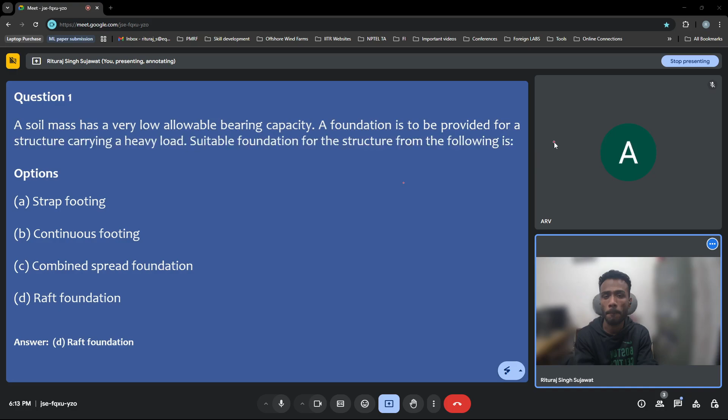So instead of distributing the load among the discrete foundations, you are basically transferring the whole load coming from the superstructure to a raft, and then that raft will basically transfer your load to the soil beneath. So yeah, the answer D, the raft foundation, for question number 1.

Moving to question number 2. So the bearing capacity of soil strata which is supporting a footing of size 3 meter by 3 meter will not be affected by the presence of the groundwater table if it is located at a depth of, so you need to determine that depth of water table such that below that it won't affect the bearing capacity of your soil strata.

Okay, question number 2D. So yeah, let's wait for 1-2 minutes. In that case, let's say when we'll upload the video, this will give time to our learners who will watch the video at a later stage.

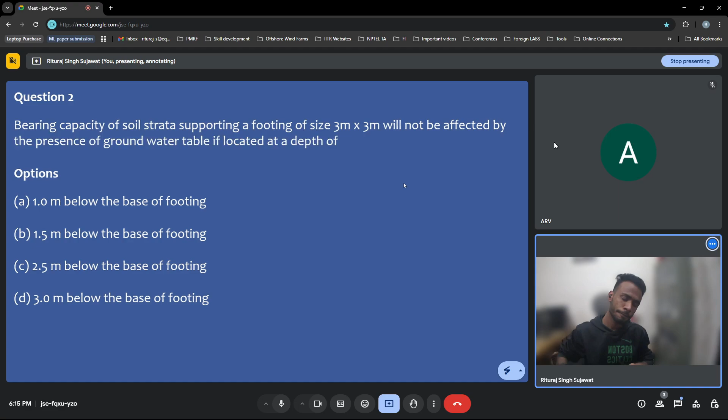So let's see the answer. So yeah, answer D is 3 meter below the base of the footing. So if you are having a foundation which has a width of, let's say, 3 meter, in that particular case the depth of the soil under consideration, below which whatever water depth is available, it won't affect the bearing capacity of the soil, corresponds to the width of the foundation. So let's see from the load transferring mechanism in that particular case.

So let's say this is your ground, and you are having a certain foundation which is there on the surface. This foundation is subjected to a certain load, let's say P. So if you see the corresponding plastic zones which will usually form when your foundation is subjected to an upcoming load, in that particular case your stress diagram will look something like this.

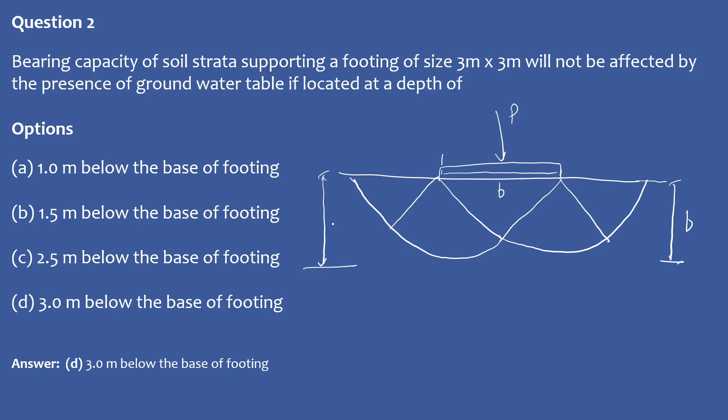So if the water depth is available, let's say, anywhere in this particular range of depth, then your bearing capacity will get affected, and below this there won't be any effect from the water table. So this was your question number 2, and the answer is 3 meter below the base of the footing. Moving to question number 3.

Sir, can I have a small clarification? Sure, sure. In the previous question, here B stands for the least lateral dimension, I think. Yeah. So I have drawn the stress diagram in that particular direction only. Yes, sir. Okay. The meaning of B in this one is, for different footings we have different values of B.

For example, square footing, it is B into B. Yes. For rectangular footing, it is B into L, in which we take only B, the least lateral dimension. Yes. Even for a strip foundation, B is the least lateral dimension; the other dimension is infinite. Yes. In case of circular footing, I think it is equal to the diameter, no, sir? Yes, sir, it's equal to the diameter in the case of circular footing. Okay, so that was my doubt.

In case of circular footing, books normally don't mention it. Yes, the least lateral dimension is the diameter. Yeah, it's basically the diameter in that particular case. That's all, sir. Yeah, it's the least dimension under consideration. Among all the plan dimensions available, we basically take the least one, and then we'll assume that the stresses will happen orthogonal to that particular dimension. That is the idea. Yes, sir, clear. Okay.

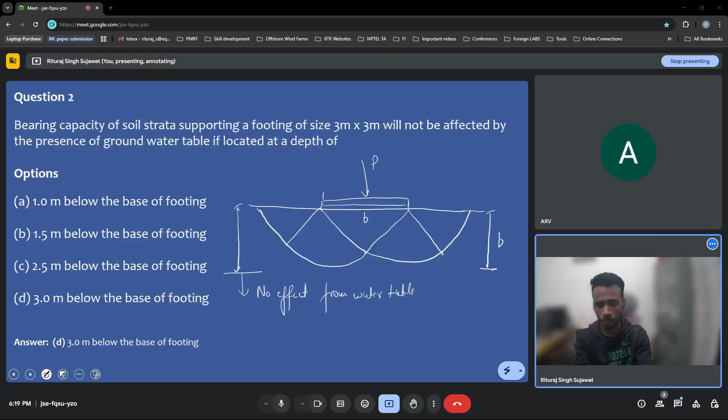So let's move to question number 3. I guess the answer is already visible in this, but yeah, you can try. So for the ultimate bearing capacity of the circular footing, there are some correction factors which have been given by Terzaghi, for how the shape affects the bearing capacity. Usually the formula given by Terzaghi for the strip footing, or let's say for plane strain cases, gives the bearing capacity in this particular form.

But for footings other than the strip footing, if the shape of the footing changes, then you need to introduce some correction factors, and the correction factors are given here. These correction factors then take your bearing capacity into account. So for the circular footing, this correction factor is 1.3, on the resistance offered by the cohesive nature of the soil. So you will apply the 1.3 correction factor, and then this is the correction factor due to, let's say, the unit weight of the soil.

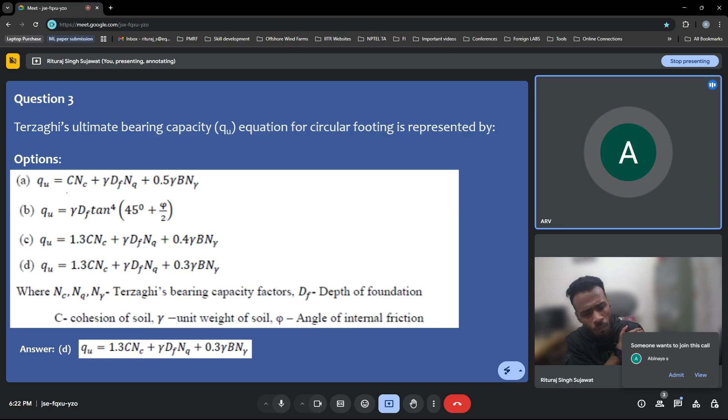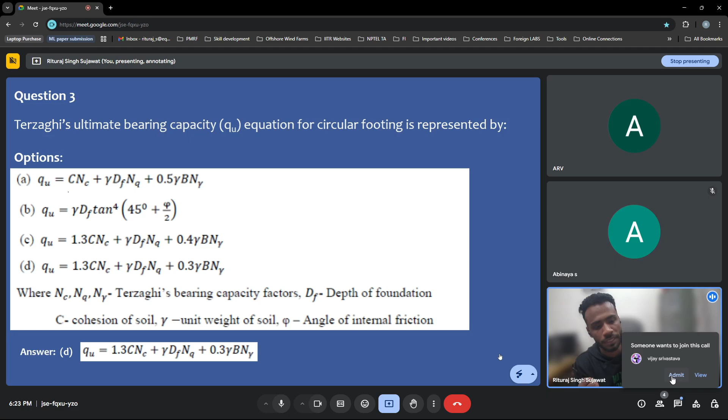A small comment for you, sir: Professor Dilip Kumar Baidya solved some examples in week 3, second lecture, where he made a mistake in the correction factor. He did not consider the square footing shape factor correctly in two examples—he took 1.3 at the beginning but 1 by 2 at the last term. I have made a comment in the forum, so please go through it. If you mention it in the forum, they'll pass your query to the TAs, who are internal TAs of Professor Baidya, and they will communicate your query to him. So that will be considered. Let's move to our next question.

Question number 4: in Terzaghi's bearing capacity analysis, the soil wedge which is just below the footing remains in a particular state. Among these four options, you need to analyze, considering Terzaghi's bearing capacity analysis, in which particular equilibrium stage your soil wedge will be when the footing has been placed above the soil.

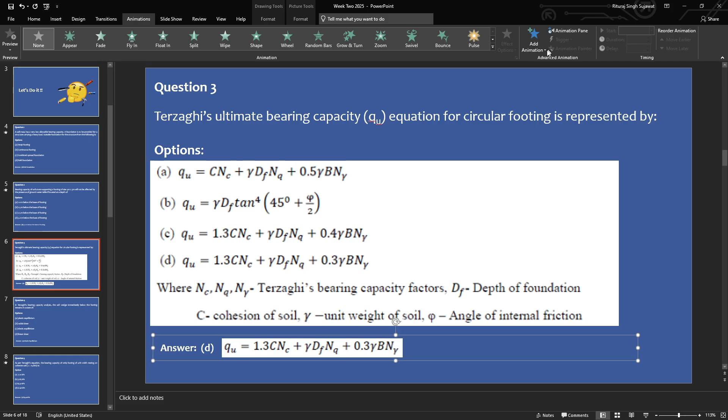Sir, all the questions you are giving answers to—has this question also come by mistake? I guess it has come by mistake. Let me check, and you can update. Once again, no problem, we'll wait. Thank you. I guess all are fine; these two or three questions in between got disturbed.

I guess the answer is already clear to you: it's basically elastic equilibrium. Let me explain this in detail. When a footing is subjected to dead load above, the soil beneath the foundation first exhibits elastic nature. The external stresses applied to the soil can be analyzed using elastic equilibrium, where you can directly apply Hooke's law—if you know the corresponding equivalent stiffness, you can calculate the stress in the soil. After elastic equilibrium, the soil enters the plastic stage, and zones form that govern whether the soil is in general shear failure, local shear failure, or punching shear failure. So the first stage, as soon as the load is applied, the soil acts in the stage of elastic equilibrium. So option C is the answer.

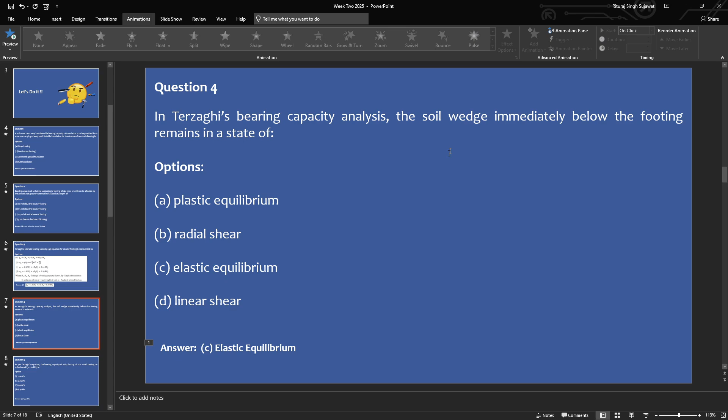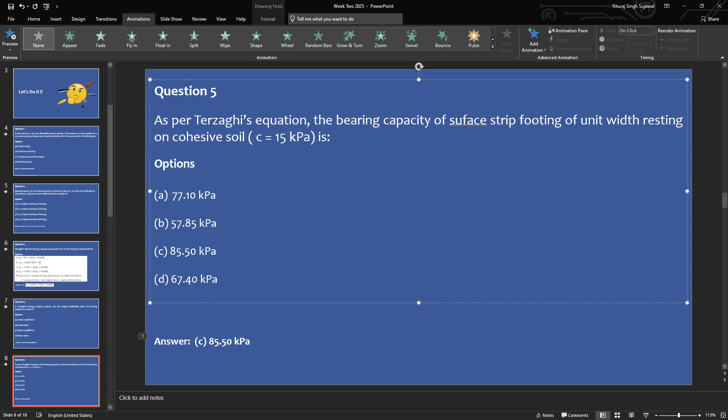That's enough, sir - surface strip footing. Yeah, your comments have been considered. Thank you so much.

Meanwhile, other people can solve this question. Yes, sir, go ahead. Yeah.

Sir, in this question, by default, if you don't mention anything, do we assume it is ultimate bearing capacity? Yeah, because if you assume it is not, you need to assume it's the ultimate bearing capacity. So whether you want to calculate the net safe bearing capacity or the safe bearing capacity, it will be mentioned.

For this example, both are same because depth is zero. Ultimate and net both are the same - you won't be having any effect from the overburden. So the difference, it's same. Yes, sir.

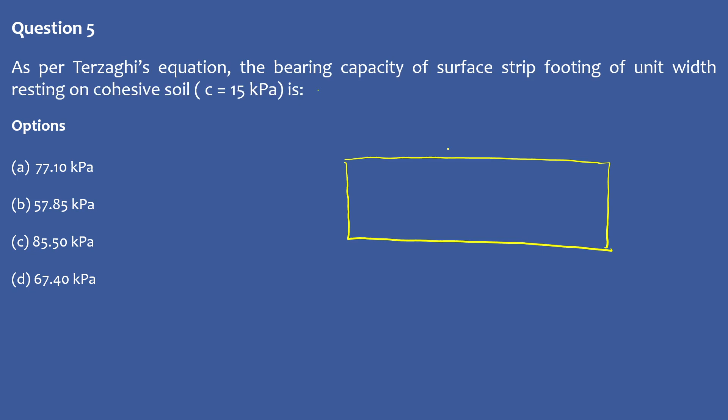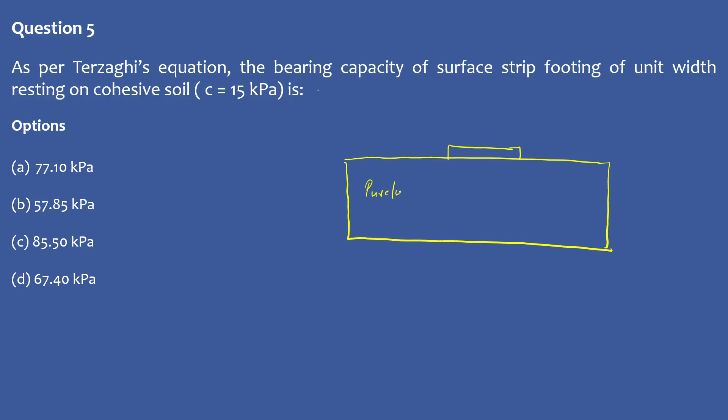So let's understand this. You are having a certain soil domain available to you. In that soil domain, you are having a strip footing. This strip footing is resting on a cohesive soil - so this is a purely cohesive soil, which is having cohesion of 15 kPa.

Usually your ultimate bearing capacity is given by this formula, and since it's a surface footing, the effect from the overburden won't be taken into account. And again, since it's a pure cohesive soil, you won't be having effect from the frictional properties - so your unit weight won't be taken into account, and this term will be zero.

So the only resistance will be from the cohesive component, and you need to calculate the bearing capacity factor corresponding to cohesion, which is basically a function of your friction angle. Since friction angle is 0 in this case, the Nc value, if you check the table, is given by 5.71. So Qu can be calculated as 5.71 into cohesion given to you.

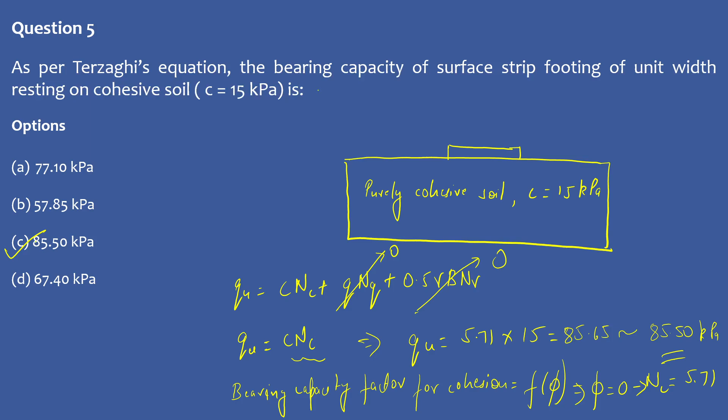Any doubt in this? If not, let's move to question number 6. You are having two particular statements in front of you. You need to analyze which statement is correct - either both can be correct, or both can be wrong. You need to mark the particular option for these two given statements.

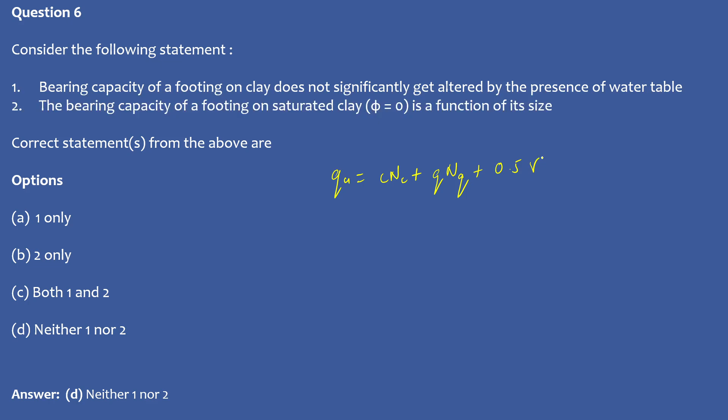So let's check this. Usually the bearing capacity for your strip footing can be analyzed from this formula, right? So let's say for statement 1...

Here it's basically talking about the bearing capacity of a footing on a saturated clay as a function of its size. If we check this particular equation, we can see that nowhere does your size come into picture. Usually in the third term you'll see the B available, which is basically taking the size of your footing into account. But for your saturated clay condition, your third term gets nullified and you remain with only the first two terms, which are C and Nc, and Q and Nq. So in that case, your bearing capacity formula will be C Nc plus Q Nq, and you won't have any effect from the size of the footing.

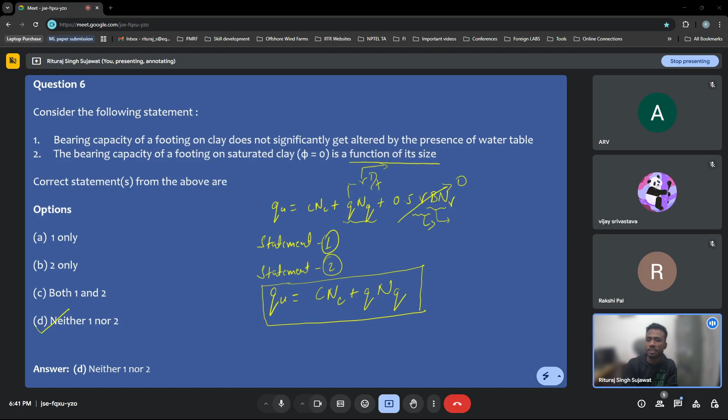So the final answer will be neither one nor two. Any doubt in this?

Then let's move to our next question, question number 7.

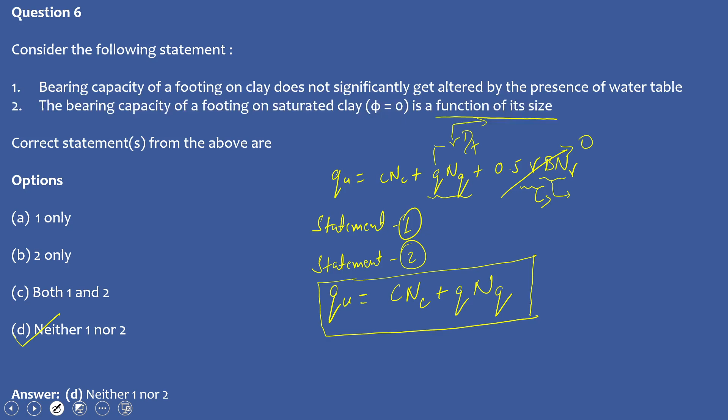Here size means only top, sir, three-dimension depth will not come into picture? No, depth won't come into picture. Anyway, we don't take into account the depth, the thickness of the foundation, usually doesn't come into play while evaluating the bearing capacity. So the question is of a similar fashion, you have two statements in front of you and you need to check which of them is correct, and accordingly mark the correct option.

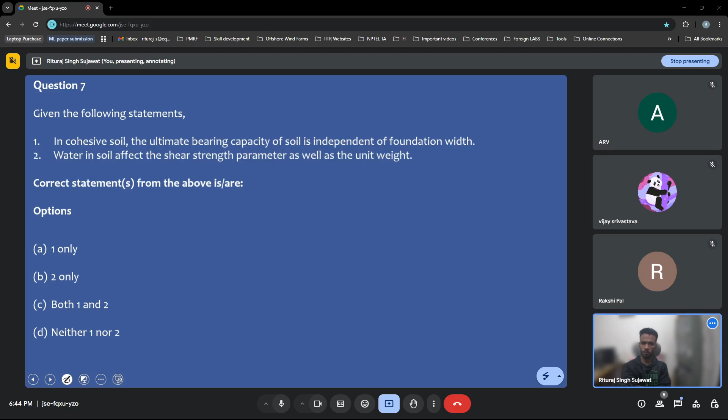One is given answer B, one is given answer D. You can write the equation again and let's check which of them is correct.

Sir, small clarity required in the question. Yeah, please. Normally this mistake is there everywhere, in textbooks as well as in many coaching centers. Cohesive soils is normally an indication of the C-phi soil. Pure clays only have C. Granular materials will have only phi.

So is your question correct for cohesive soil or pure clay? For this particular question, the wording is indicating purely cohesive, that's why I have given option D, sir. So if it is pure clay, the answer will be different. If it's cohesive soil, the answer will be different.

I guess the terminology some people use is: in between phi soil and C soil, you have the C-phi soil. So if it's not C-phi soil, then it will either be phi soil or, since it's mentioned as cohesive soil, we take C into account. These terminologies vary from researcher to researcher, place to place. But for our particular case, cohesive soil meant purely cohesive soil, or let's say C soil, where you don't have any frictional component into account.

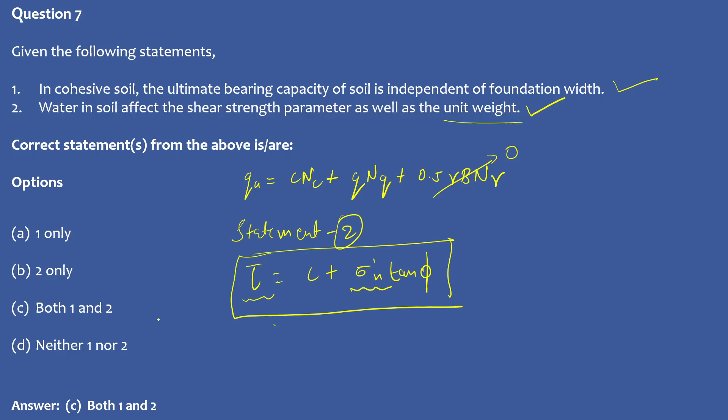So when we talk about the unit weight, this is basically the unit weight which we are taking into account for the calculation of the effective stress. So due to the presence of the water table, the unit weight of your particular soil is also getting changed. So water is anyhow affecting the unit weight. That's why both statement 1 and statement 2 are correct, and the correct option is option C, both 1 and 2.

Yeah, please, ARV. Sir, a little interaction, sir, as per the question. Statement one is okay, I agree, because you mentioned that it is pure clays, it is a correct answer. But coming to statement two, look at the question clearly, sir. Water in the soil affects the shear strength parameters, not the shear strength. You have given shear strength parameter. Shear strength parameters means not the tau. It is going to be C and phi.

Shear strength parameter as well as the unit weight. You have given shear strength parameter as well as unit weight. Unit weight is correct. That's why we go for corrections, submerged or gamma effective, everything. But shear parameters C and phi are not affected by the water. As you told, sigma n is correct, which consists of gamma and D. But if you see the bearing capacity equation, in none of the locations we have tau or capital S. So, how do you calculate the cohesion?

Okay, I understood. There is a confusion between the shear strength and the shear strength parameters. So, okay, let's talk about the cohesion also, the C and phi. I'll consider your statement. Rather than focusing on the tau, let's focus on the C and the phi. So, do you think the cohesion will get affected due to the presence of the water table?

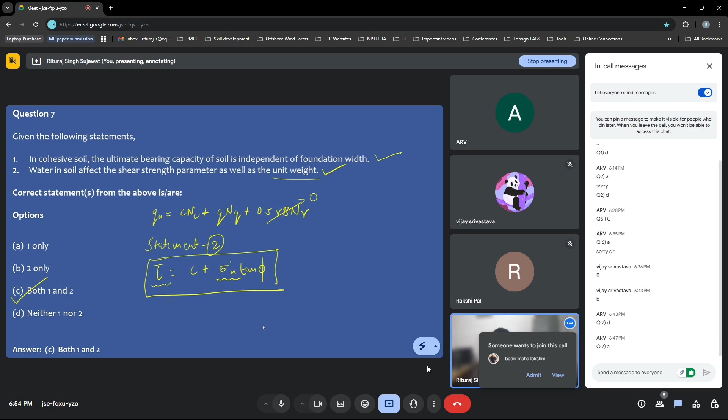So when we are talking about the C and the phi, how do you basically calculate the C? It depends upon three types of tests, with drainage, without drainage. Yeah. So the water will affect your test, right? So subsequently, your cohesion will also get affected due to that. Your C value will also get affected. Maybe I have to spend some time on this further. Yeah, just check with this.

So okay, I got your first doubt. That is totally acceptable from my end. I thought it's the shear strength we are talking about, but yeah, it's the shear strength parameters. But even those shear strength parameters are getting affected due to the presence of the water, because whatever test you are performing to calculate those shear strength parameters, due to the presence of the water table, those parameters are getting affected.

Yes, sir. Overall, whatever shear parameters C and phi and gamma are affecting, that alters only the left hand side, the shear strength or shearing resistance. But your question is not about shearing resistance. Your question is about bearing capacity. In the second statement, it's nowhere the bearing capacity.

Second statement, it is not related to the bearing capacity, sir. Yeah, it's not related to the bearing capacity. It's a general statement they are basically discussing. Okay. I thought you are teaching about the bearing capacity unit. It's related to the same. Yeah, so before going to the bearing capacity, these statements in general come.

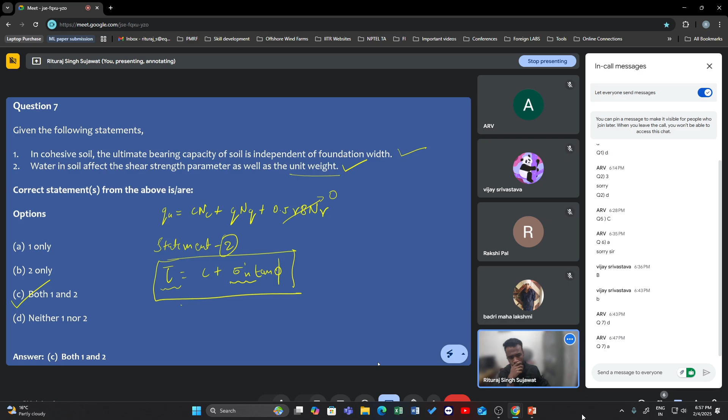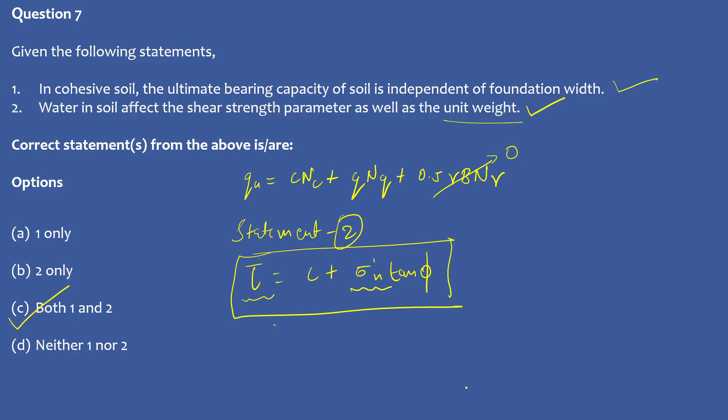Okay, if there is no doubt, then we can move to our next question, question number 8. I guess it's repeated, we have already covered this. So let's go to question number 9. You are having two circular footings with diameter d1 and d2, supported on the surface of the cohesive soil. The ratio d1 by d2 is equal to 2.4. If the ultimate load carrying capacity of the footing of diameter d1 is 190 kPa, you need to determine the ultimate bearing capacity of the footing of diameter d2.

A question based on the similar concept has come for the third time. So accordingly you can evaluate the ultimate load carrying capacity, ultimate bearing capacity.

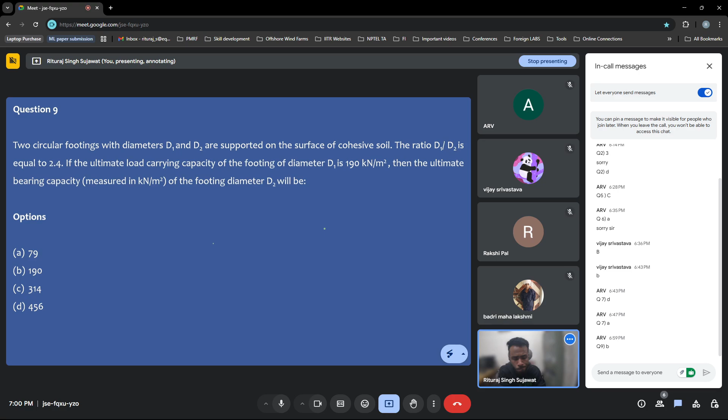Yeah, so let's check the answer. It's based on the similar concept which I have discussed previously. So the answer is 190. As we have discussed, for this particular case, when your footing is lying on the surface of cohesive soil, your bearing capacity is independent of the size of the footing.

So in the first case, you have the footing diameter d1, and in the second case the diameter d2. Though the size of the footings varies, ultimately your bearing capacity is independent of the size of the footing. So the bearing capacity available for diameter d1 will be the same for diameter d2. That's why the bearing capacity in this case will be 190 kPa. So the answer for question 9 is 190 kPa.

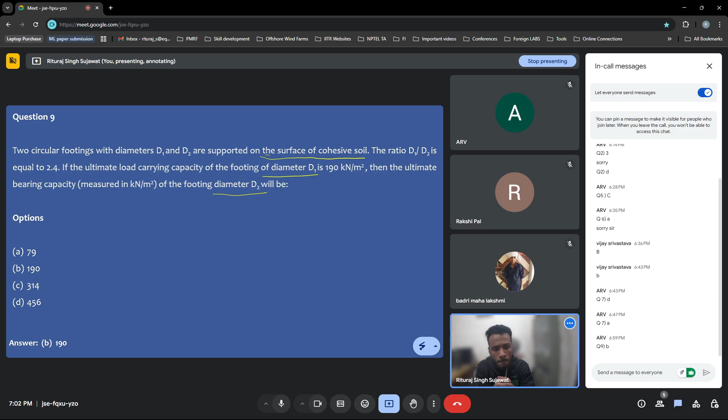Any doubt in this? No, sir. Fine. Okay, then let's move to our next question.

In this question, a consistent deposit of stiff clay supports a strip wall footing that is 1.5 meters wide and 0.8 meters deep. The soil has an unconfined compressive strength of 142 kPa and a unit weight of 21.8 kN per meter cube. During the subsurface investigation, no groundwater was found within 6 meter depth. You need to evaluate the ultimate bearing capacity of this footing.

So you have stiff clay with zero friction angle. It supports a strip wall footing that is 1.5 meters wide and 0.8 meters deep. The soil has an unconfined compressive strength of 142 kPa, unit weight of 21.8 kN per meter cube. No groundwater was found within 6 meter depth, and accordingly you need to determine the ultimate bearing capacity in kPa.

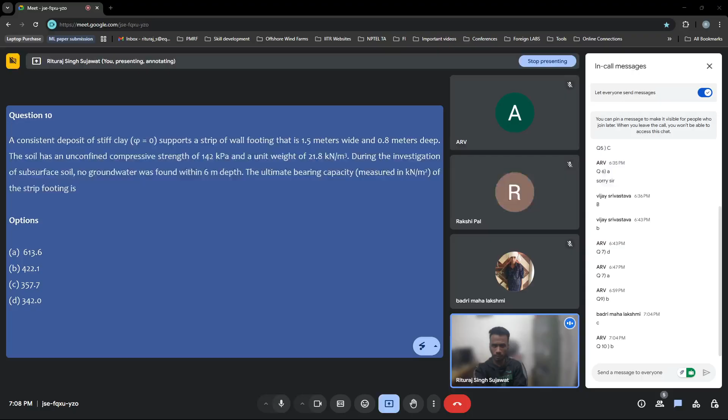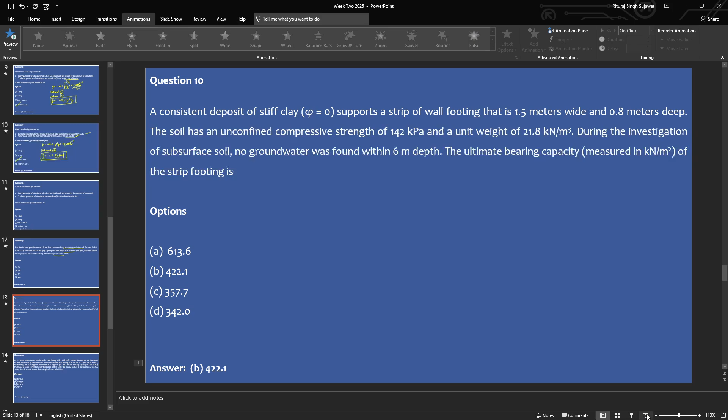So let's check this. So whenever you encounter such type of question, 1 second, guys. Yeah. So the correct answer is option B. So while I was talking, whenever you encounter such type of question, since you need to calculate the bearing capacity using Terzaghi's theory, your first task is to analyze the bearing capacity factor.

So we know the bearing capacity is given by qu = c Nc + q Nq + 0.5 gamma B N gamma, right? Since it has been mentioned the clay is stiff clay and your friction angle is 0, one of your shear strength parameters is 0, and in that particular case this term will get nullified. So the bearing capacity will be only c Nc plus q Nq. So first you need to calculate the bearing capacity factors, Nc and Nq.

So for phi equals 0, how much is Nc? It is 5.71, right? And how much is Nq? I guess it's 1, right? Yeah. So for our case, you haven't been given the cohesion, you have been given the unconfined compressive strength. So what is the relation between the cohesion and the unconfined compressive strength? It's an unconfined compressive strength of 142 kPa.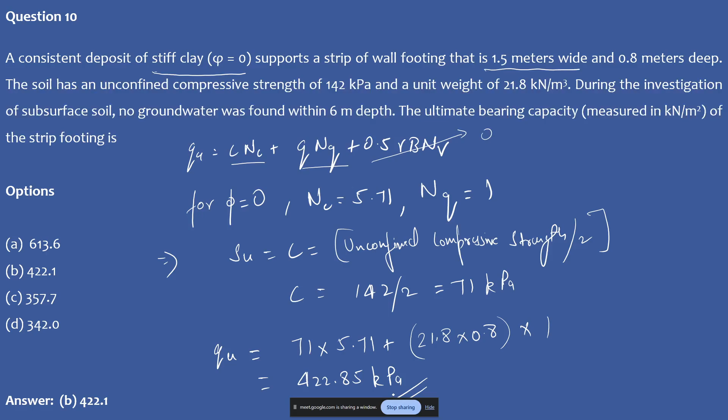So how much is it giving: 71 into 5.71 plus 21.8 into 0.8. Yeah, so that is giving you 422.85 kPa. So this is your bearing capacity in this particular case. Any doubt in this? Yeah, if not, then let's move to our next question.

So question number 11 is in front of you. At 1.5 meter below the surface is located a strip footing with a width of 2 meter. A consistent medium dense sand deposit makes up the subsurface. The saturated and dry unit weights of the soil are given to you, which are 21.2 and 18.1. The angle of internal friction is given to you.

You need to evaluate the ultimate bearing capacity of the footing when the water table is 1.6 meters below the ground surface. Given for phi equals 34 degree, Nc is 52.64, Nq is 36.5, N gamma is 38.04, and the unit weight of water is 9.81 kN per meter cube.

So till now we were not taking the water table into account, but now the water table has come into the picture. So you need to take the effect of the water table, because the width of the footing is 2 meter and your water table is available at just 1.6 meter below the ground surface.

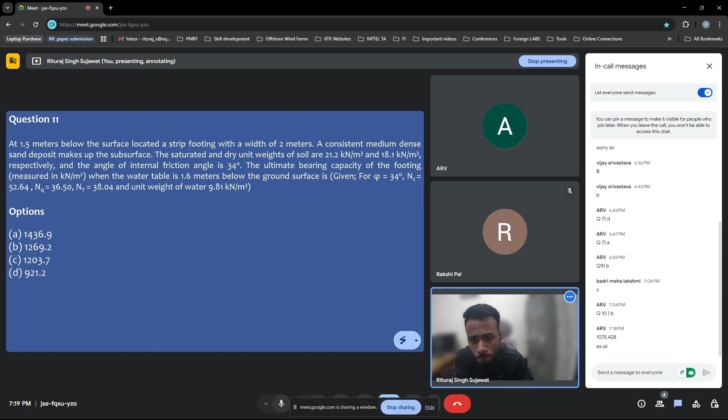Yes, sir. Let me write the equation, sir. So qu is equal to c Nc plus q Nq plus 0.5 gamma B N gamma, right? Fine, sir. In this particular case the first part is getting 0 because c is 0. Then the only terms remaining will be q Nq plus 0.5 gamma B N gamma.

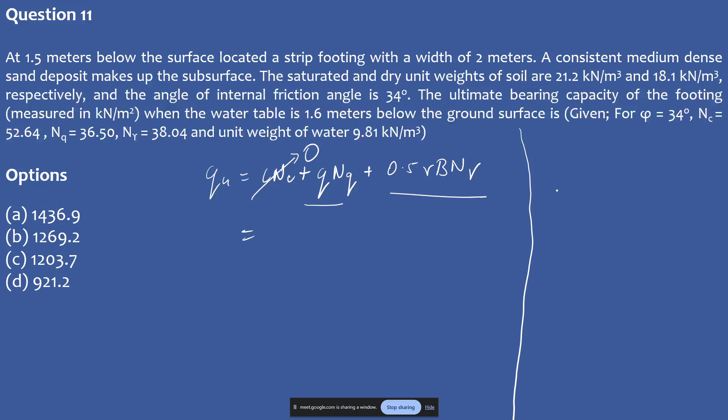Let's understand with the diagram. Yeah, the diagram is important in this particular case. So let's assume this is your ground level. This is your footing.

So your depth of the footing which is given to you is 1.5 meter, right? And your width of the footing which is given to you is 2 meter, right? Then your water table is 1.6 meter below the ground surface. So here is your water table. So this is the depth of 1.6 meter. So the total difference between depth from water table to here is 0.1 meter.

Okay, now you need to evaluate q Nq plus 0.5 gamma B N gamma. So q is basically your overburden which is available at this particular depth, right? So again, how much is your phi? Phi is 34 degrees and your Nq and N gamma are given to you, right? Given, sir. So q is basically gamma dry into depth of the foundation. Gamma dry is 18.1 into depth of the foundation, 1.5 meter. And your Nq value given to you is 36.50. Okay, that's correct. And now this bearing capacity term is 0.5.

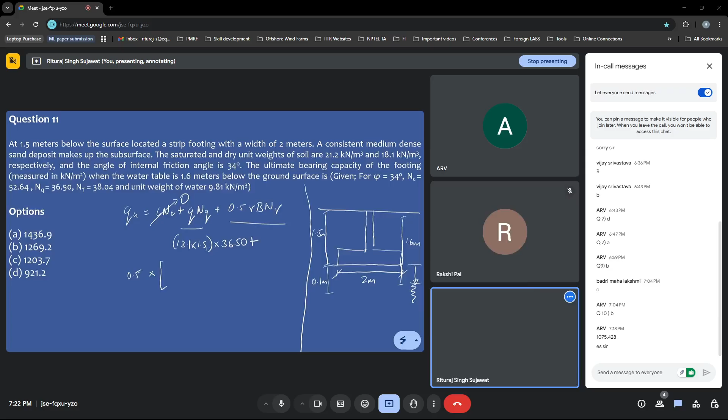Now let's calculate how much is your gamma effective. Gamma effective is a very low value. It is 11.73. So how did you calculate this? Gamma dry into 0.1 plus gamma submerged into 1.9. Gamma submerged is 21.2 minus 9.81, right? Into this depth, 2 minus 0.1, so 1.9 meter. B minus that you have considered, is it? Yes, sir. B minus 0.1. That is indirectly. Okay.

So it's basically the unit weight which is available, and we will multiply with this particular depth. You need to draw one more line, sir, at the bottom below the water table, the remote water table line at a depth of B. Yeah, okay. Draw one more line somewhere below the water table. So now this is your B, right? That is 2 meter, equivalent to B. Okay, now we can calculate this. Now it is clear, I think.

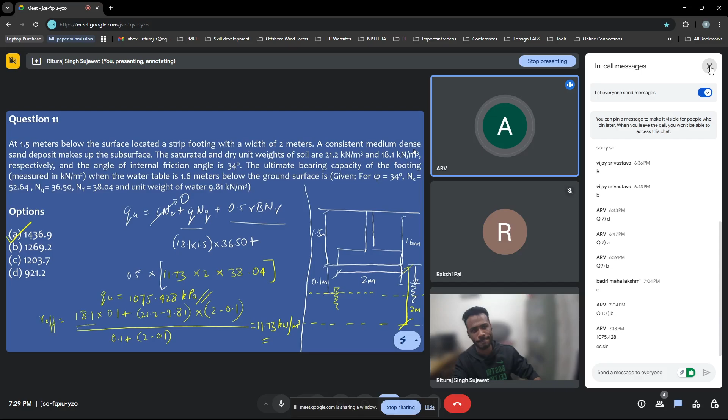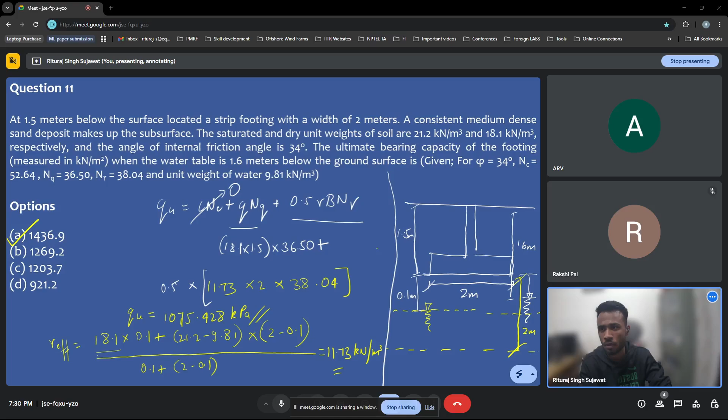Okay, and rest of the things are fine. So everyone understood the concept. So basically, whenever you are having the water table, the only component which is getting affected is your unit weight. So accordingly, you can interpolate your unit weight with whatever depth is available to you. So the depth of the water table basically allows you to get the effective unit weight. So I guess we can move to our next question. Yes, sir. The answer is A.

So the next question is in a similar fashion. The only part here is now your water table is available 0.6 meter below the ground surface. So now it's another case where your water table is available between the ground surface and the depth of the footing. So you can take all the data from here. The only data changing is the water table at a depth of 0.6 meter from the ground. So it's somewhere here. Can you keep the next slide, sir? Yeah.

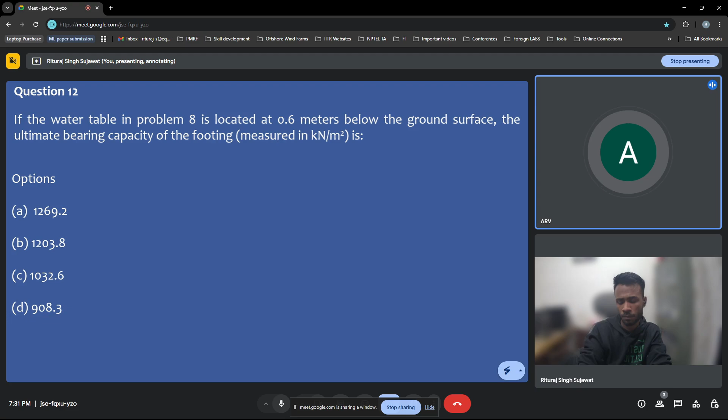Are you giving time, sir, to solve this? Yeah, please take your time. Okay. Do you want the data from the previous slide? I have it already, sir. I don't know about other people. I think only you are here. Other people, I think they left or may rejoin. But I will take only the water table at 0.6 meters. Yeah, 0.6 meter below the ground. Okay, sir.

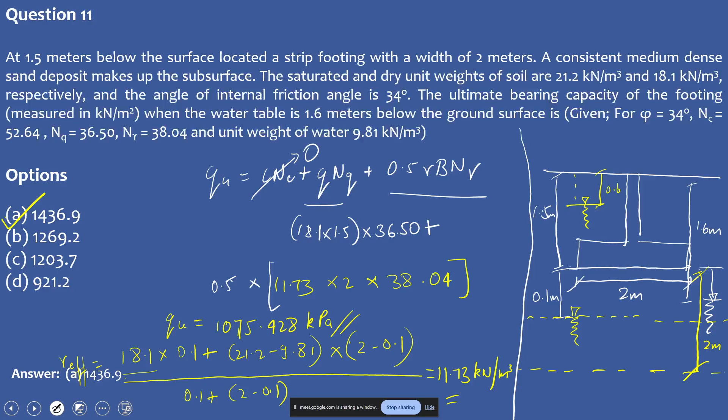And how much is your saturated? 21.2 minus 9.81, right? Yes, sir. It is 11.39. So for 0.9 meter it's 11.39 submerged unit weight. So your QU: this will be 0, your Q will be 0.6 into 18.1 plus 0.9 into 11.39. Your Nq value is 36.5. Then 0.5 gamma effective. Sir, gamma effective divided by depth you have not written: 0.6 into 18.1 plus 0.9 into 11.39 divided by H1 plus H2, 1.5 you have to write.

No, here we won't take the effective, right? Yes, sir, it is effective only. Whenever it is going to be intermediate, it is going to be effective. Otherwise, you don't get it, you can check the answer.

Like previous, we take gamma effective only whenever the water table is intermediate between ground level and foundation level. For the second case, for example, the third term is 0.5 into gamma into B into N gamma - that gamma we take completely submerged. This is submerged, but here we are talking about the overburden, right? Yeah, that is gamma effective, sir, because it's partially gamma dry.

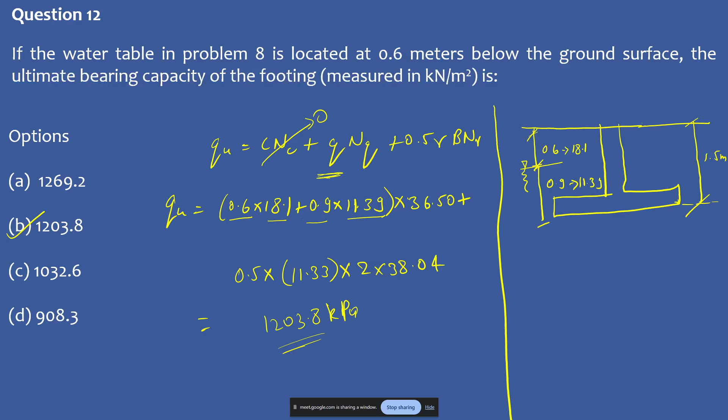Done, sir. Then let's go for next question, question number 13. Sure, sir. So here you need to identify the definition of sensitivity - sensitivity of soil can be defined as...

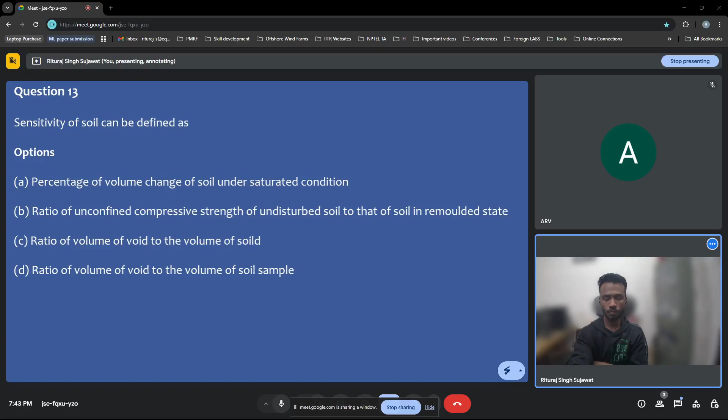By virtue of its definition, we know it's the ratio of the unconfined compressive strength of undisturbed soil to that of soil in remolded state. Whenever we want to know how sensitive any particular soil is to the load coming from the superstructure, we can go for the sensitivity test. In that case, first we analyze how much is the unconfined compressive strength when the soil is undisturbed, then consider the case when the soil is remolded, and take the ratio. You can go through the codal guidelines - I don't remember the particular code right now, but it's given how you can analyze the sensitivity. This is the particular relation you can utilize to calculate the sensitivity of the soil.

So I guess it's clear from its definition. Let's go to question number 14.

A sample of saturated cohesionless soil tested in a drained triaxial compression test showed an angle of internal friction of 30 degrees. You need to analyze the deviatoric stress at failure for the sample when it is tested with a confining pressure of 200 kPa.

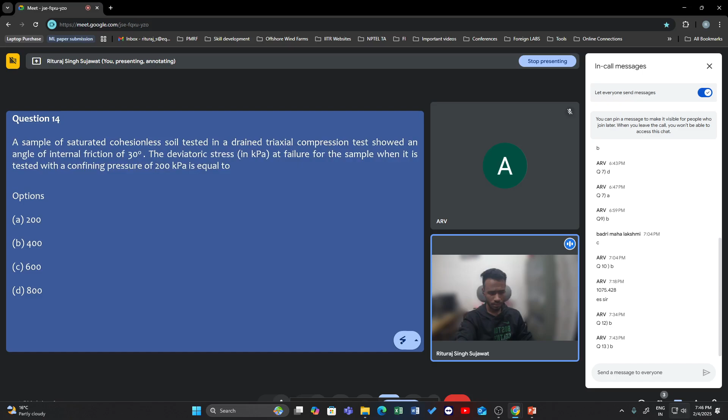But there's one more correct approach we usually go for, through the finite element approach. Here we basically utilize continuum modeling to understand how our soil is getting failed, and with the help of that method we draw the load deformation curve, and understand how our soil is abruptly changing its deformation behavior. That particular deformation behavior, and the capacity available at that point, will basically give how much is the bearing capacity. So just give me 5 to 10 minutes, I'll show you that.

Are you sharing another screen, sir? Yeah, yeah, I'm sharing that. So is it visible? Yes, sir.

So this is a particular case. Today's geotechnical engineers typically utilize a continuum modeling approach to understand how to calculate the bearing capacity.

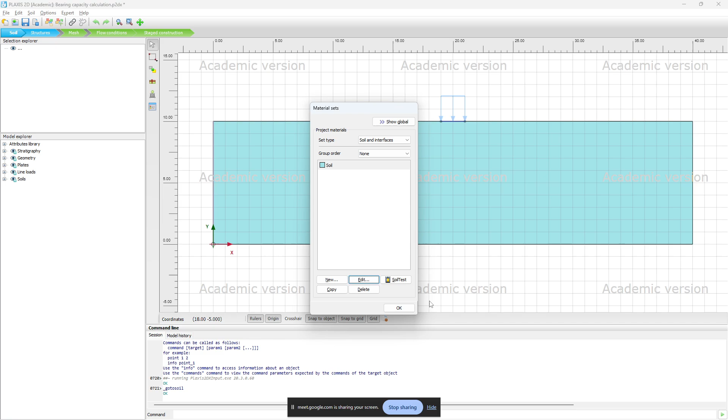We discussed the Mohr-Coulomb criteria briefly in the last class, and these are some of the parameters dedicated to this constitutive model. We have assigned these model parameters to the soil domain, and this particular footing has been designed as a line element, with a certain load now applied to it.

Then basically this is the meshing you perform to discretize your geometry into small elements.

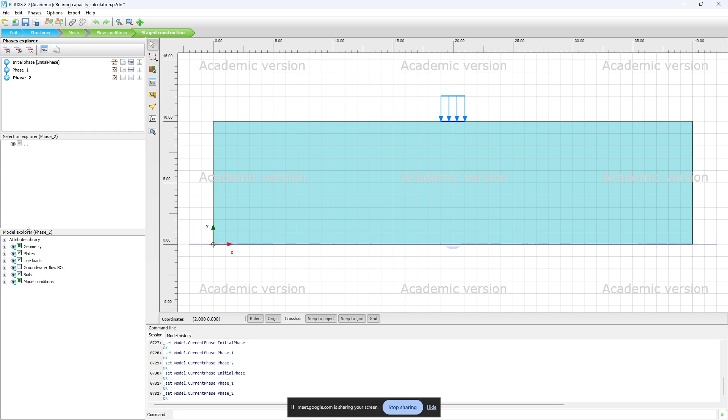Then you go to stage construction, where there are different construction stages taken into account. First you introduce the soil domain, then you introduce your footing, and then you apply load on that. All these parameters can be controlled from this model explorer.

I understand that grasping this at such speed is almost impossible, but my basic idea is to give you an intuition of how finite element modeling calculates the bearing capacity. So just have a feel of this software right now.

Is there any possibility of zooming the picture? Not that picture, sir — actually the numericals you are selecting are not visible. All small things. Let me try this. Is it not visible properly? The diagram is clear, blue color and everything is there, load is visible, but on the left hand side, number one and number two are not clear.

If the NPTEL team permits, at the end of our whole sessions, I'll take a whole class on the PLAXIS software with a proper demonstration. For the time being, I'm just giving a brief overview and introduction of how it's basically happening.

Have you worked on the PLAXIS before? No sir, I haven't. Sorry for that. I'll introduce you to PLAXIS in the last sessions for sure. So you are having a certain load — have you worked on any other finite element software before? No sir, that's also no, we didn't have it at the undergraduate level.

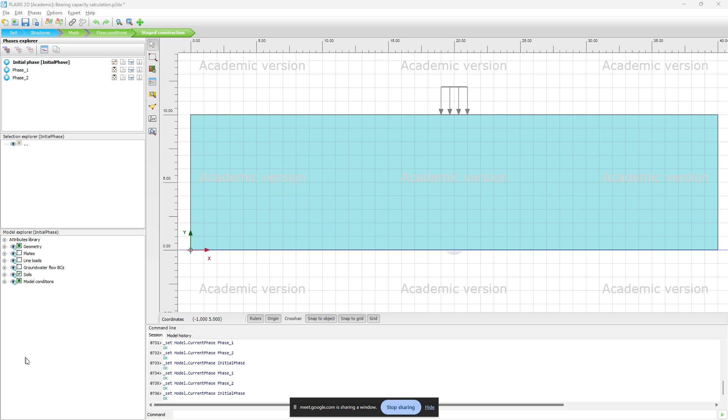At least from the geotechnical perspective, I can introduce you and give a brief overview about these packages between the classes, so we can get a feel of it.

So this is the thing — we are basically dividing the construction stages, and now I'll perform the calculation here. This is the calculation happening. That's why we are not that thorough with analytical calculations nowadays, since we are utilizing finite element packages to solve geotechnical problems. I totally understand having the proper conceptual theory from Terzaghi's formulation is important, but since in practice we are more into finite element packages, we've had a little distance from those formulations, and that's why we make some errors in between. So our calculations have been performed — I'll share my screen again.

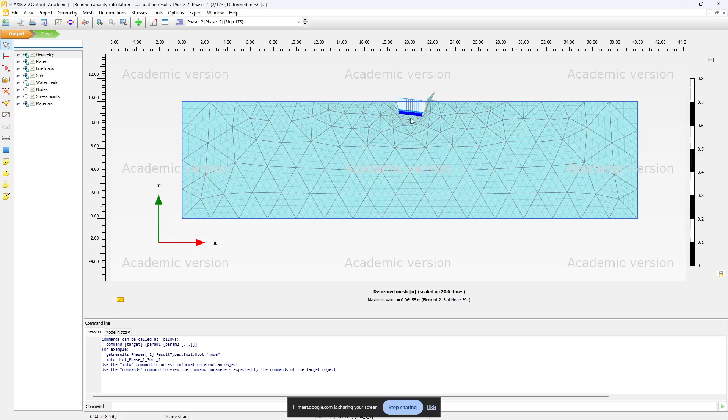So we'll go to charts, new.

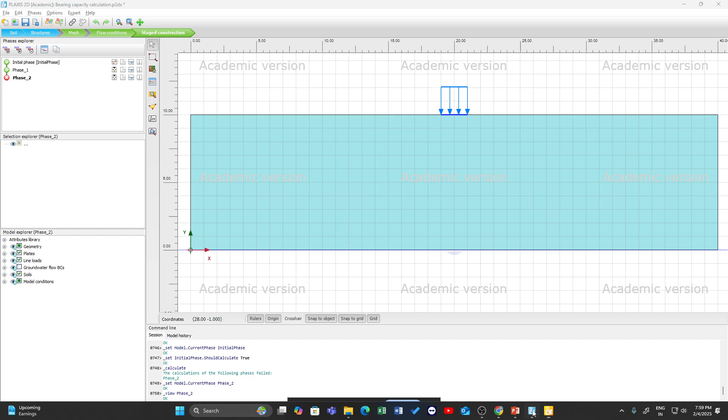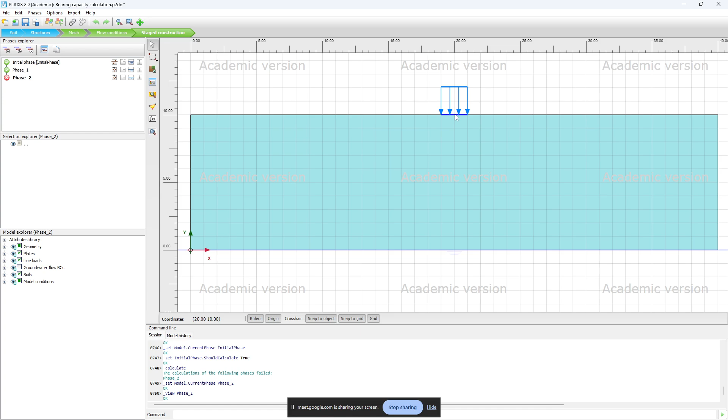So that was the part I wanted to highlight. So if we take a finite element at a different node, the deflection will be different, sir? Yeah, the deflection will be different in that particular case. So final answer, the node should always be close to the footing? Yeah, it should always be close to the footing. Anywhere, at the center or edge, it doesn't matter, sir? Usually we take it at the center because the center is the most critical point.

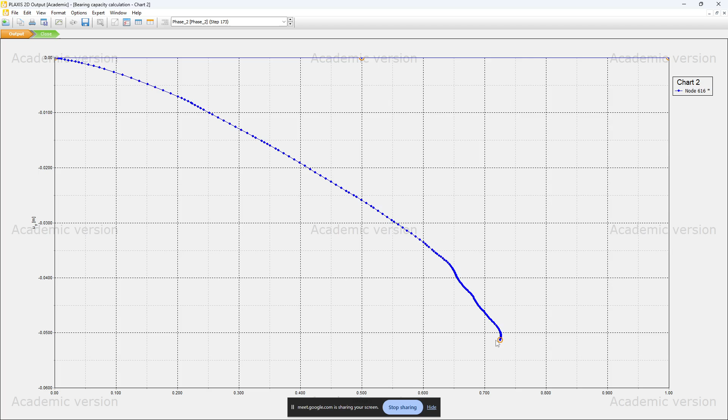Again, if you go through Terzaghi's approach, we usually see your plastic zone starts at the edge of your footing. So sometimes we also take the node at the edge into account, but we'll check in those particular sessions how much your result fluctuates if we take the node at the center or at the edge. So we'll check that. We'll be having a proper demonstration on that. So that was the thing I wanted to highlight.